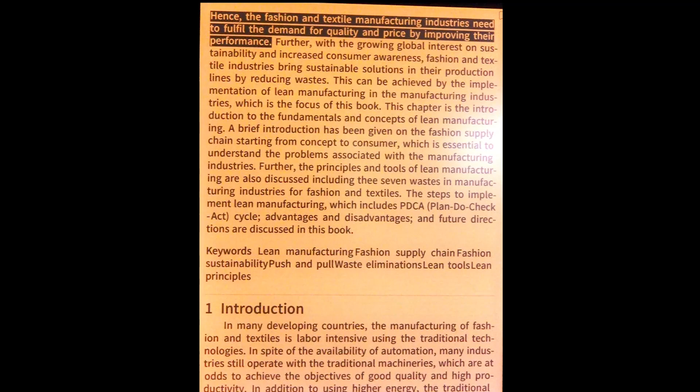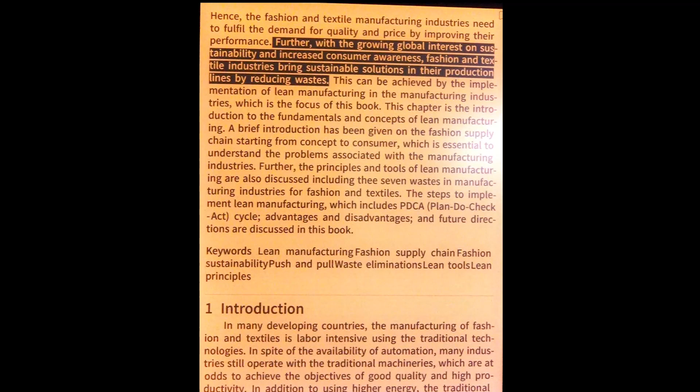And low product quality. The global marketplace is getting more and more competitive day by day with demand on high value-added products at cheaper prices. The fashion and textile manufacturing industries need to fulfill the demand for quality and price by improving their performance. Further, with the growing global interest on sustainability and increased consumer awareness, fashion and textile industries bring sustainable solutions in their production lines by reducing wastes.

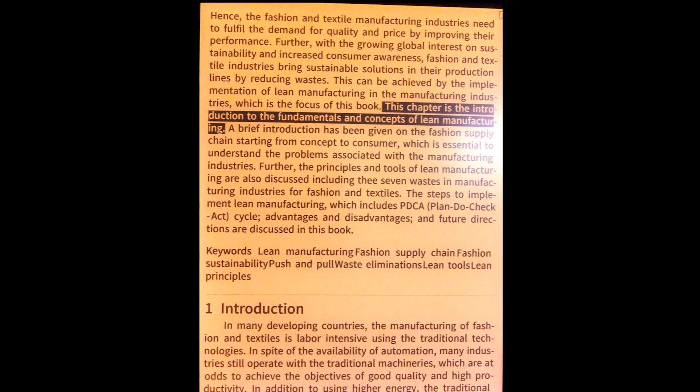This can be achieved by the implementation of lean manufacturing in the manufacturing industries, which is the focus of this book. This chapter is the introduction to the fundamentals and concepts of lean manufacturing. A brief introduction has been given on the fashion supply chain starting from concept to consumer, which is essential to understand the problems associated with the manufacturing industries.

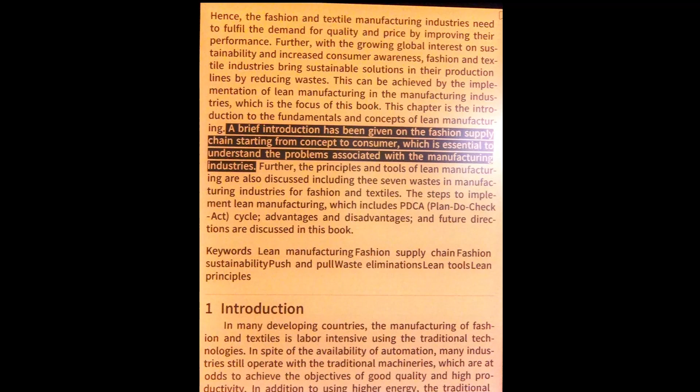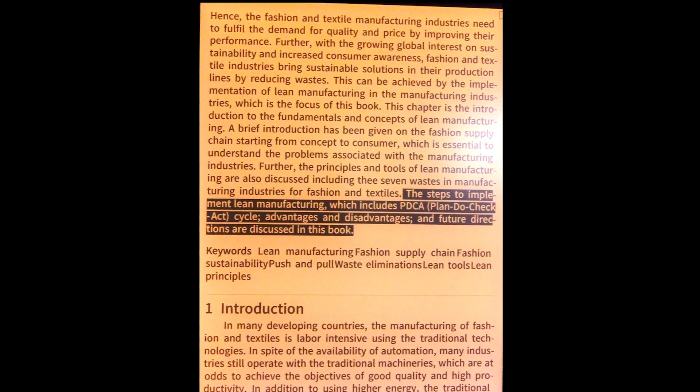Further, the principles and tools of lean manufacturing are also discussed, including the 7 wastes in manufacturing industries for fashion and textiles. The steps to implement lean manufacturing, which includes PDCA, Plan Do Check Act, cycle, advantages and disadvantages, and future directions are discussed in this book. Keywords: lean manufacturing, fashion supply chain, fashion sustainability, push and pull, waste eliminations, lean tools, lean principles.

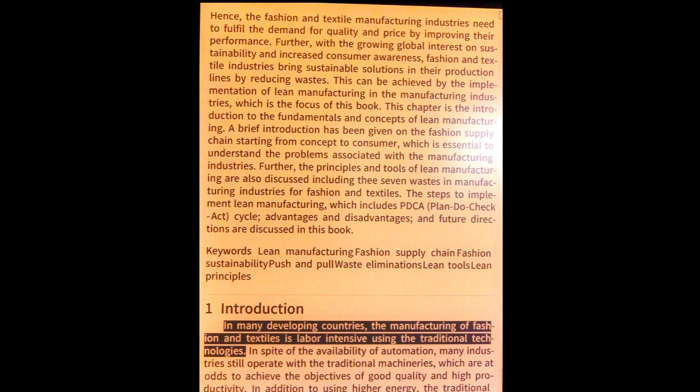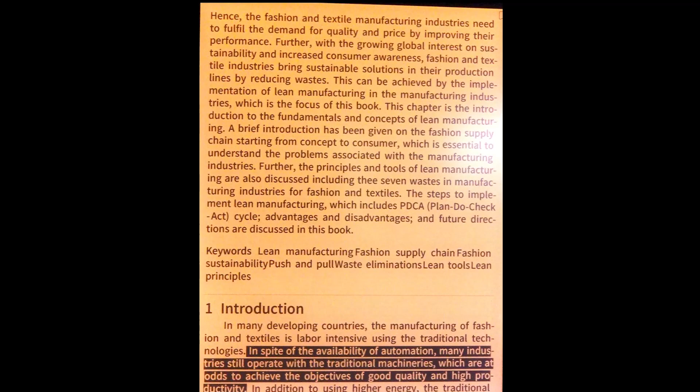1 Introduction. In many developing countries, the manufacturing of fashion and textiles is labor-intensive using the traditional technologies. In spite of the availability of automation, many industries still operate with the traditional machineries, which are at odds to achieve the objectives of good quality and high productivity. In addition to using higher energy, the traditional technologies generate more wastage.

And greenhouse gases. The global demand of fashion and textiles is fulfilled by the manufacturing services of industries located in developing countries. There has been a paradigm shift of manufacturing from developed countries to developing countries. The developing countries such as Vietnam, Cambodia and Bangladesh are the leading manufacturers of fashion and textiles.

The manufacturing activities in China and India, the past leaders, are gradually declining in the drive of keeping the cost of production low. The fashion and textile manufacturers in developing countries are operating in stiffer competition in the global marketplace. The increasing labor cost, rising utility charges, increase in the cost of materials and demand for sustainable fashion and textiles has made it difficult for the manufacturers to produce the products

at cheaper price. Many of the large enterprises in these countries have well coped with the global demand due to larger volume of production and timely investment on new technologies (Nayak et al. 2020B). However, there are several manufacturers of raw materials, trims, semi-finished products, and final garments, especially small and medium-sized enterprises (SMEs), who cannot upgrade themselves due to financial problems; hence, they still operate using the traditional technologies.

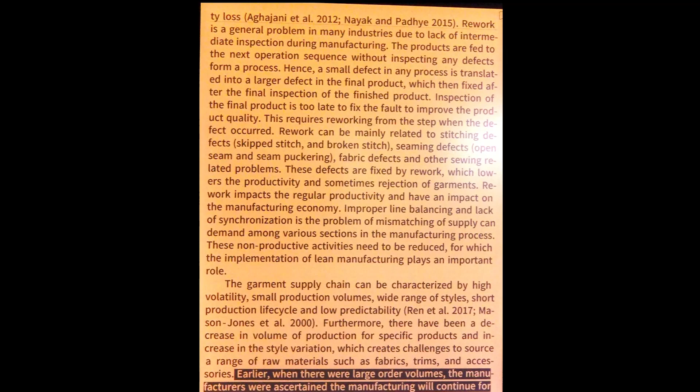2017, Mason-Jones et al. 2000. Furthermore, there has been a decrease in volume of production for specific products and increase in the style variation, which creates challenges to source a range of raw materials such as fabrics, trims, and accessories. Earlier, when there were large order volumes, the manufacturers were assured the manufacturing would continue for several weeks or months. However, decrease in order quantities has led to frequent change of product lines, increased sourcing activities influencing the profitability. In order to cope with these changes, the garment manufacturers need to focus on the implementation of lean manufacturing.

The concept of lean manufacturing is based on reducing waste, reducing inventory, increasing productivity and efficiency by reducing the amount of rework. Majority of the clothing manufacturers in developing countries follow the Progressive Bundle System, PBS, which aims at mass production of apparels, Desai et al. 2012. In the PBS systems, the work related to a specific garment is performed progressively one after the other. Machines and equipment are arranged sequentially depending on the type of the garment forming an assembly line. Multiple assembly lines can be used for a specific garment style.

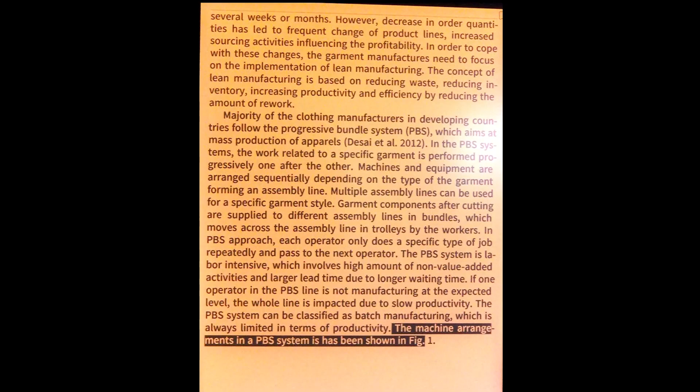Garment components after cutting are supplied to different assembly lines in bundles, which move across the assembly line in trolleys by the workers. In the PBS approach, each operator only does a specific type of job repeatedly and passes to the next operator. The PBS system is labor-intensive, which involves a high amount of non-value-added activities and larger lead time due to longer waiting time. If any operator in the PBS line is not manufacturing at the expected level, the whole line is impacted due to slow productivity. The PBS system can be classified as batch manufacturing, which is always limited in terms of productivity. The machine arrangements in a PBS system are shown in Fig. 1. Fig. 1: PBS system in a garment manufacturing industry.

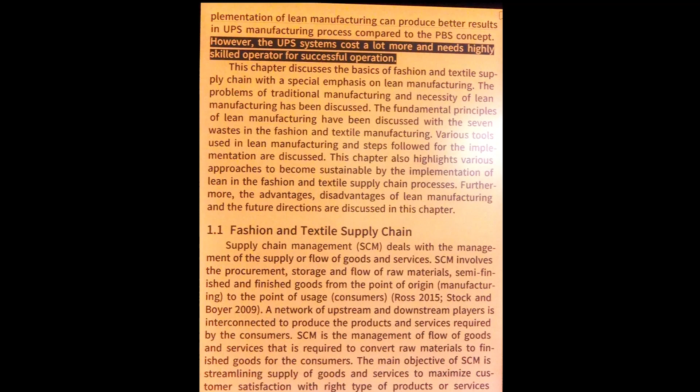To overcome these limitations, the PBS systems can be replaced with cellular manufacturing systems or unit production systems, UPS. In the UPS system, the cut pieces hung on hangers are automatically transported by an overhead conveyor system. One hanger carries all the components for a garment, which is transported automatically. Hence, the manual operations are replaced with an automatic transport system. A garment is manufactured through the different steps of production and the final garment is hung back in the hanger system. The implementation of lean manufacturing can produce better results in the UPS manufacturing process compared to the PBS concept. However, the UPS systems cost a lot more and need highly skilled operators for successful operation.

This chapter discusses the basics of fashion and textile supply chain with a special emphasis on lean manufacturing. The problems of traditional manufacturing and necessity of lean manufacturing have been discussed. The fundamental principles of lean manufacturing have been discussed with the 7 wastes in fashion and textile manufacturing. Various tools used in lean manufacturing and steps followed for the implementation are discussed. This chapter also highlights various approaches to become sustainable by the implementation of lean in the fashion and textile supply chain processes. Furthermore, the advantages, disadvantages of lean manufacturing and the future directions are discussed in this chapter.

1.1 Fashion and Textile Supply Chain. Supply Chain Management (SCM) deals with the management of the supply or flow of goods and services. SCM involves the procurement, storage and flow of raw materials, semi-finished and finished goods from the point of origin, manufacturing, to the point of usage, consumers, Ross 2015, Stock and Boyer 2009. A network of upstream and downstream players is interconnected to produce the products and services required by the consumers.

SCM is the management of flow of goods and services that is required to convert raw materials to finished goods for the consumers. The main objective of SCM is streamlining supply of goods and services to maximize customer satisfaction with the right type of products or service, Christopher 2016. SCM can be defined as the design, planning, execution, control and monitoring of supply chain activities with the objective of creating net value, building a competitive infrastructure.

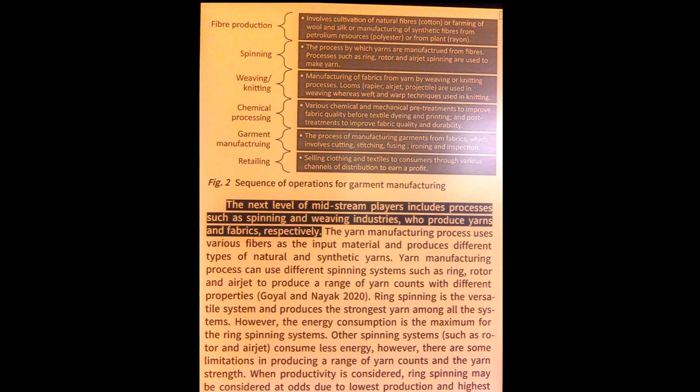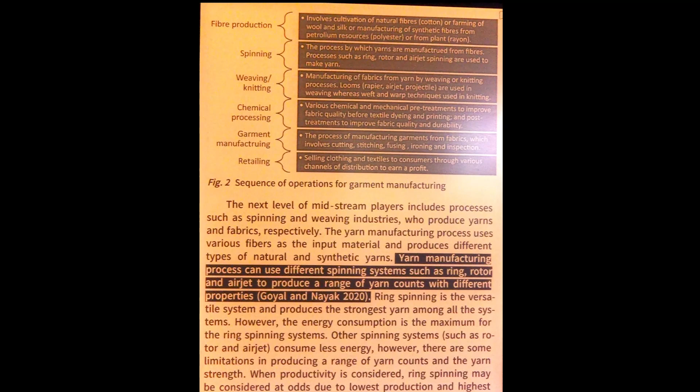The next level of midstream players includes processes such as spinning and weaving industries, who produce yarns and fabrics, respectively. The yarn manufacturing process uses various fibers as the input material and produces different types of natural and synthetic yarns. Yarn manufacturing can use different spinning systems such as ring, rotor and air-jet to produce a range of yarn counts with different properties, Goyal and Nayak 2020.

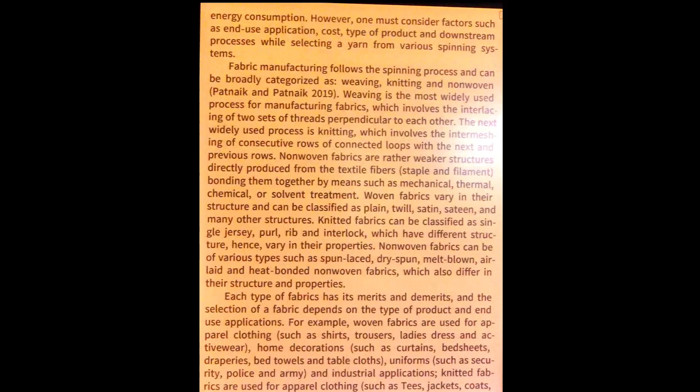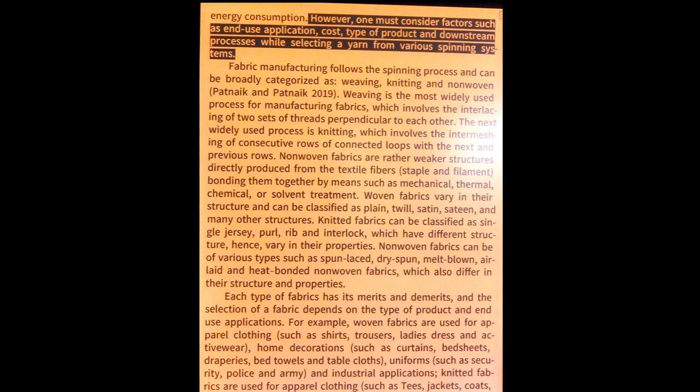Ring spinning is the versatile system and produces the strongest yarn among all the systems. However, the energy consumption is the maximum for ring spinning systems. Other spinning systems, such as rotor and air-jet, consume less energy. However, there are some limitations in producing a range of yarn counts and the yarn strength. When productivity is considered, ring spinning may be considered at odds due to lowest production and highest energy consumption. However, one must consider factors such as end-use application, cost, type of product and downstream processes while selecting a yarn from various spinning systems. Fabric manufacturing follows the spinning process and can be broadly categorized as weaving, knitting and nonwoven,

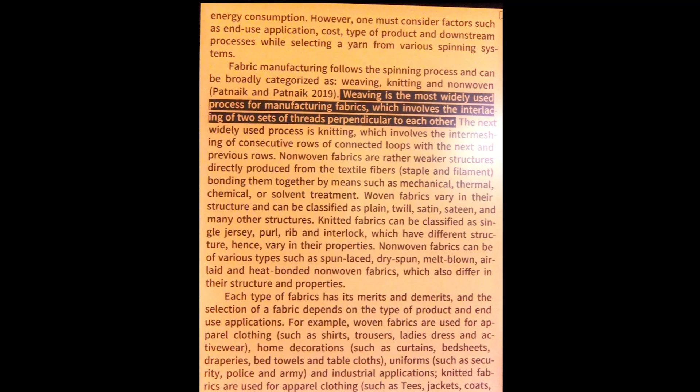Patnaik and Patnaik 2019. Weaving is the most widely used process for manufacturing fabrics, which involves the interlacing of two sets of threads perpendicular to each other. The next widely used process is knitting, which involves the intermeshing of consecutive rows of connected loops with the next and previous rows. Nonwoven fabrics are rather weaker structures directly produced from the textile fibers, staple and filament, bonding them together by means such as mechanical, thermal, chemical

or solvent treatment. Woven fabrics vary in their structure and can be classified as plain, twill, satin, sateen, and many other structures. Knitted fabrics can be classified as single jersey, purl, rib and interlock, which have different structures, hence vary in their properties. Nonwoven fabrics can be of various types such as spun-laced, dry spun, melt-blown, air-laid and heat-bonded nonwoven fabrics, which also differ in their structure and properties. Each type of fabric has its merits and demerits, and the selection of a fabric depends on the type of

product and end-use applications. For example, woven fabrics are used for apparel clothing, such as shirts, trousers, ladies' dresses and activewear, home decorations such as curtains, bed sheets, draperies, bed towels and tablecloths, uniforms such as security, police and army, and industrial applications.

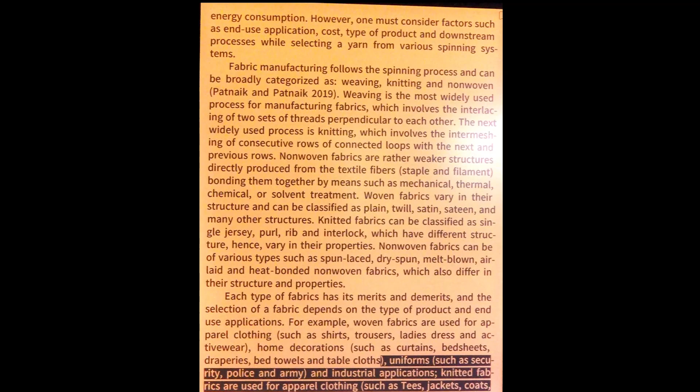Knitted fabrics are used for apparel clothing such as tees, jackets, coats, jumpers and pants, innerwear such as camisoles, undies, girdles, sleepwear and vests, sportswear such as socks, sports shoes, tracksuits and vests, home furnishings such as cleaning wipes, laundry bags and mosquito nets, and automotive textiles such as headrest lining, cushioning material and lining for motorbike helmets. Nonwovens are used for medical textiles such as surgical masks, surgery

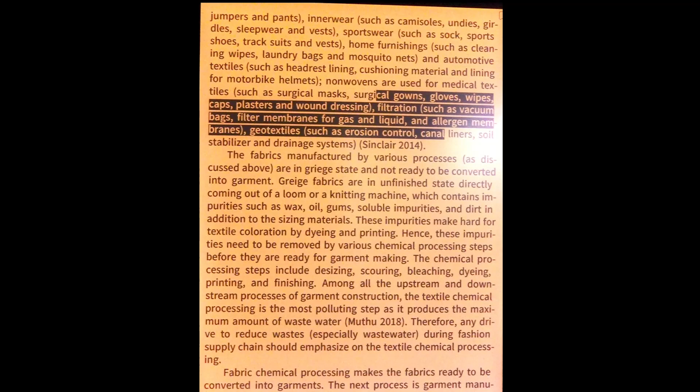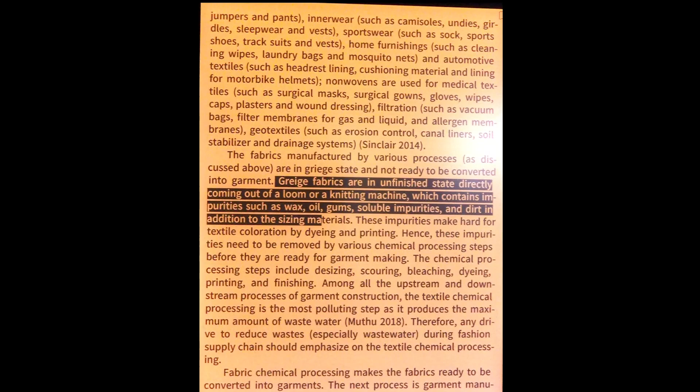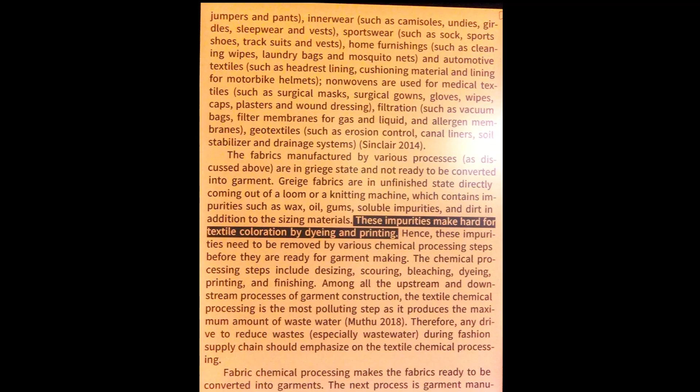such as erosion control, canal liners, soil stabilizers and drainage systems, Sinclair 2014. The fabrics manufactured by various processes, as discussed above, are in greige state and not ready to be converted into a garment. Greige fabrics are in an unfinished state directly coming out of a loom or a knitting machine, which contain impurities such as wax, oil, gums, soluble impurities, and dirt in addition to the sizing material. These impurities make textile coloration by dyeing and printing hard. Hence, these impurities need to be removed by various chemical processing steps before they are ready for garment making.

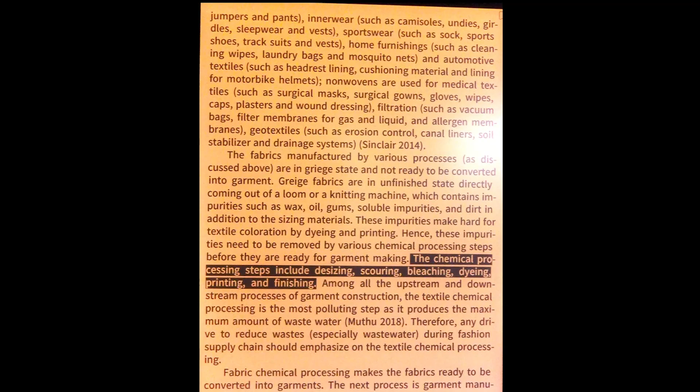The chemical processing steps include desizing, scouring, bleaching, dyeing, printing, and finishing. Among all the upstream and downstream processes of garment construction, the textile chemical processing is the most polluting step as it produces the maximum amount of wastewater (Muthu 2018). Therefore, any drive to reduce wastes, especially wastewater, during the fashion supply chain should emphasize textile chemical processing. Fabric chemical processing makes the fabrics ready to be converted into garments.

The next process is garment manufacturing, where the two-dimensional (2D) fabrics are converted into three-dimensional (3D) garments. The garment manufacturing process involves activities such as fabric inspection, spreading, cutting, bundling, fusing, sewing, ironing, inspection and packaging (Nayak and Padhye 2015). The global trend in garment manufacturing has undergone many changes from the beginning of the 21st century.

The global demand for apparel textiles is being fulfilled by only some developing countries such as Bangladesh, Cambodia, China, Laos, India, Vietnam and some countries in the European Union (EU). The manufacturing of garments at cheaper prices in developed countries such as the US, Australia or Canada is not viable due to high labor cost and energy charges. Therefore, they rely on the developing countries to fulfill their demand for fashion and textiles. In developing countries, the fashion and textile industries provide employment to a large section of the population. This sector also contributes largely towards the gross domestic product (GDP) of the countries (Nayak et al.

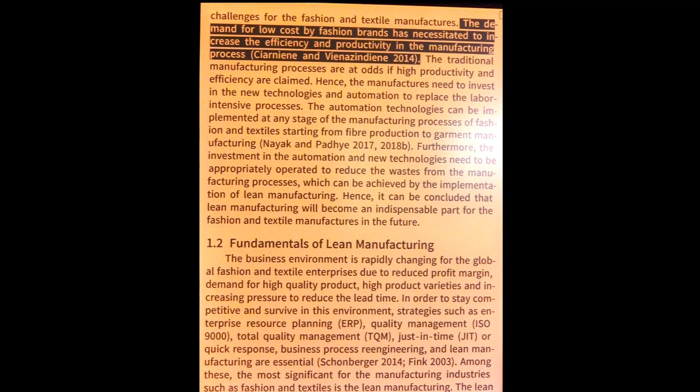The competitive global marketplace is creating a lot of challenges for the fashion and textile manufacturers. The demand for low cost by fashion brands has necessitated increasing the efficiency and productivity in the manufacturing process (Ciarniene and Vienazindiene 2014). The traditional manufacturing processes are at odds if high productivity and efficiency are claimed. Hence, the manufacturers need to invest in new technologies and automation to replace the labor-intensive processes. The automation technologies can be implemented at any stage of the manufacturing processes of fashion and textiles, starting from fiber production to garment manufacturing (Nayak and Padhye 2017,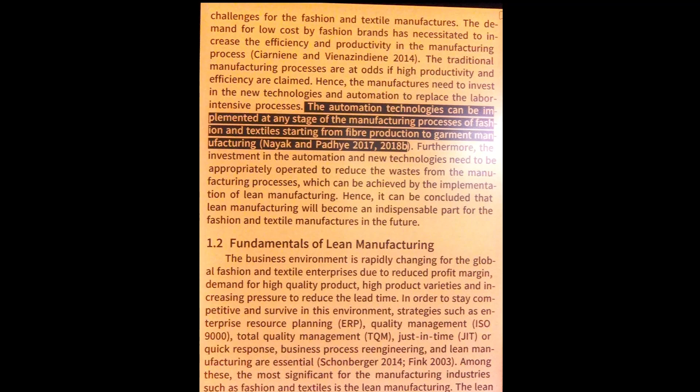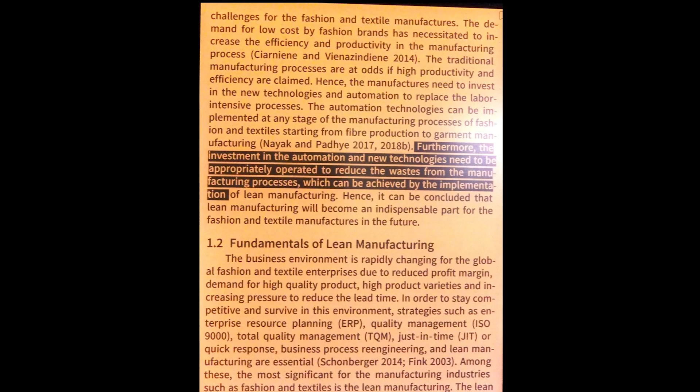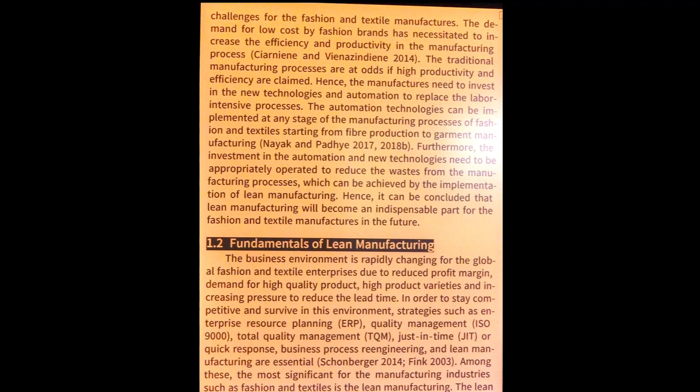2018b). Furthermore, the investment in automation and new technologies needs to be appropriately operated to reduce the wastes from the manufacturing processes, which can be achieved by the implementation of lean manufacturing. Hence, it can be concluded that lean manufacturing will become an indispensable part for the fashion and textile manufacturers in the future. 1.2 Fundamentals of Lean Manufacturing. The business environment is rapidly changing for the global fashion and textile enterprises

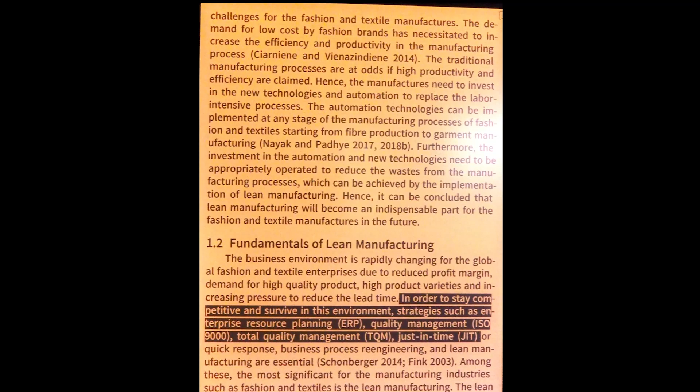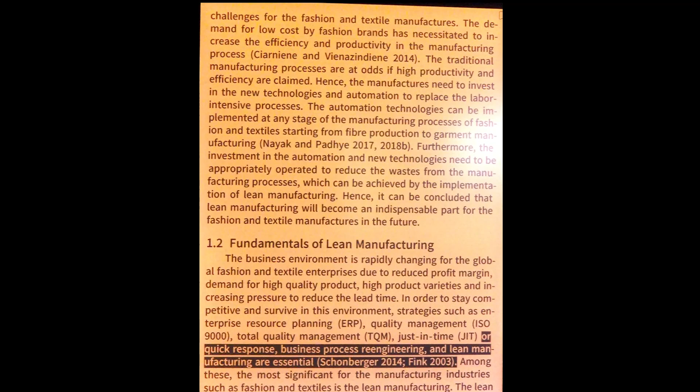due to reduced profit margin, demand for high-quality products, high product varieties and increasing pressure to reduce the lead time. In order to stay competitive and survive in this environment, strategies such as enterprise resource planning (ERP), quality management (ISO 9000), total quality management (TQM), just-in-time (JIT) or quick response, business process re-engineering, and lean manufacturing are essential (Schonberger 2014, Fink 2003). Among these, the most significant for manufacturing industries such as fashion and textiles is lean manufacturing. The lean manufacturing approach has been widely adopted by many fashion and textile enterprises in order to enhance productivity, efficiency and to achieve the desired quality.

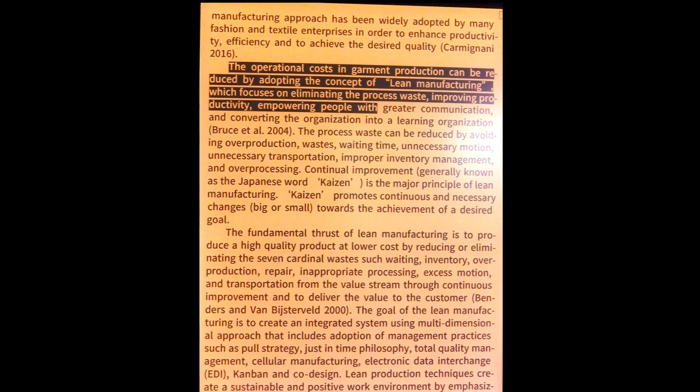(Carmignani 2016). The operational costs in garment production can be reduced by adopting the concept of lean manufacturing, which focuses on eliminating the process waste, improving productivity, empowering people with greater communication, and converting the organization into a learning organization (Bruce et al. 2004). The process waste can be reduced by avoiding overproduction, wastes, waiting time, unnecessary motion, unnecessary transportation, improper inventory management, and overprocessing.

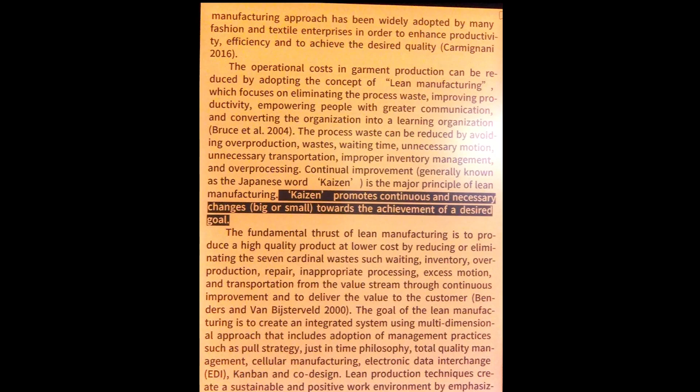Continual improvement, generally known by the Japanese word kaizen, is the major principle of lean manufacturing. Kaizen promotes continuous and necessary changes, big or small, towards the achievement of a desired goal. The fundamental thrust of lean manufacturing is to produce a high-quality product at lower cost by reducing or eliminating the 7 cardinal wastes, such as waiting, inventory, overproduction, repair, inappropriate processing, excess motion, and transportation, from the value stream through continuous improvement, and to deliver the value to the customer.

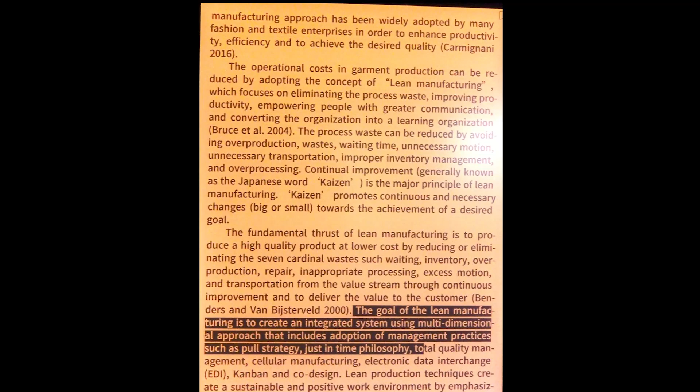Benders and Van Bijsterveld 2000. The goal of lean manufacturing is to create an integrated system using a multi-dimensional approach that includes adoption of management practices such as pull strategy, just-in-time philosophy, total quality management, cellular manufacturing, electronic data interchange (EDI), Kanban and co-design.

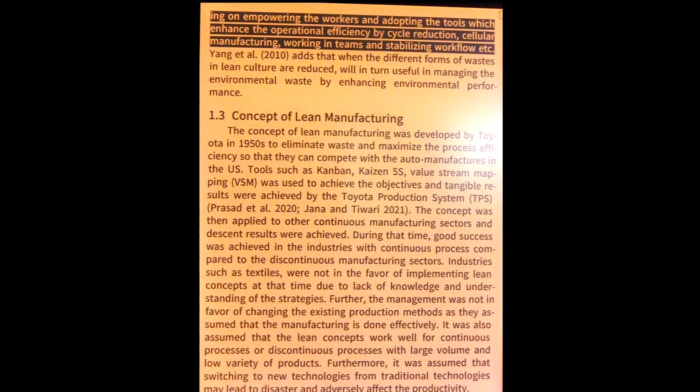Lean production techniques create a sustainable and positive work environment by emphasizing empowering the workers and adopting tools which enhance operational efficiency by cycle reduction, cellular manufacturing, working in teams and stabilizing workflow, etc. Yang et al. 2010 adds that when the different forms of wastes in lean culture are reduced, it will in turn be useful in managing environmental waste by enhancing environmental performance.

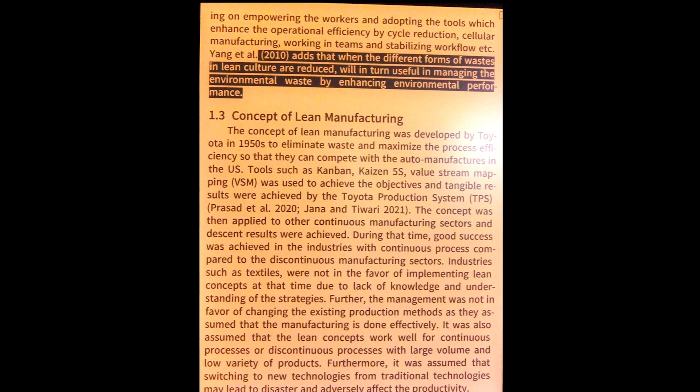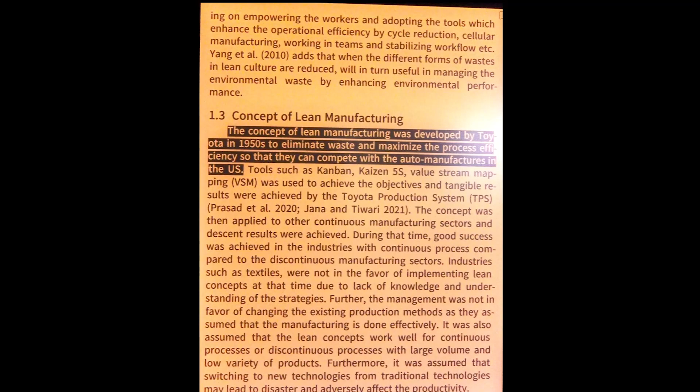1.3 Concept of lean manufacturing. The concept of lean manufacturing was developed by Toyota in the 1950s to eliminate waste and maximize process efficiency so that they could compete with auto manufacturers in the US. Tools such as Kanban, Kaizen, 5S, Value Stream Mapping (VSM) were used to achieve the objectives, and tangible results were achieved by the Toyota Production System (TPS).

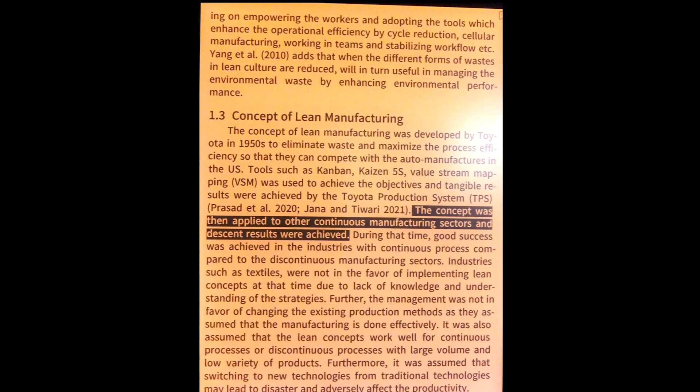Prasad et al. 2020, Jana and Tiwari 2021. The concept was then applied to other continuous manufacturing sectors and decent results were achieved. During that time, good success was achieved in industries with continuous processes compared to discontinuous manufacturing sectors. Industries such as textiles were not in favor of implementing lean concepts at that time due to lack of knowledge and understanding of the strategies.

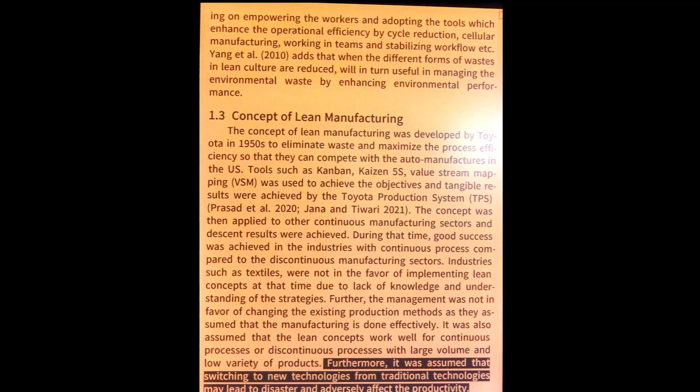Further, the management was not in favor of changing the existing production methods as they assumed that the manufacturing is done effectively. It was also assumed that lean concepts work well for continuous processes or discontinuous processes with large volume and low variety of products. Furthermore, it was assumed that switching to new technologies from traditional technologies may lead to disaster and adversely affect productivity.

Lean manufacturing concept refers to the process from raw materials manufacturing to the delivery of finished goods to the end user, with tactful management of resources resulting in monetary and time saving. It is sometimes referred to as just-in-time (JIT) systems due to their highly coordinated activities and delivery of goods that occur just as they are needed. Stevenson 2020. Lean manufacturing minimizes waste and in turn reduces costs, from which the technical term, lean, became popular ever since.

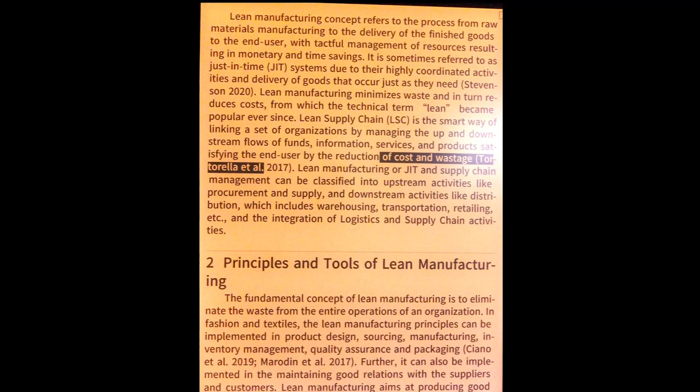Lean Supply Chain (LSC) is the smart way of linking a set of organizations by managing the up and downstream flows of funds, information, services, and products, satisfying the end user by the reduction of cost and wastage. Tortorella et al. 2017. Lean manufacturing or JIT and supply chain management can be classified into upstream activities like procurement and supply, and downstream activities like distribution, which includes warehousing, transportation, retailing, etc., and the integration of logistics and supply chain activities.

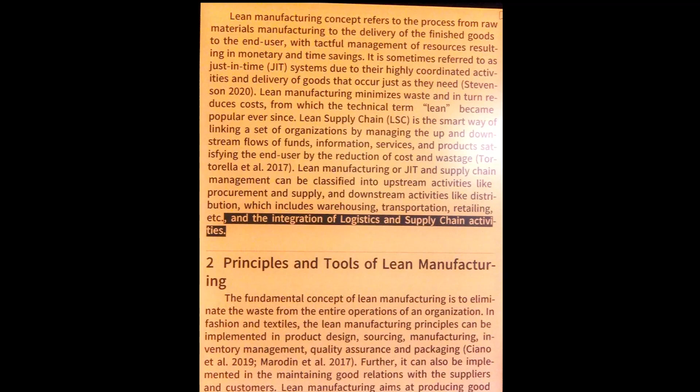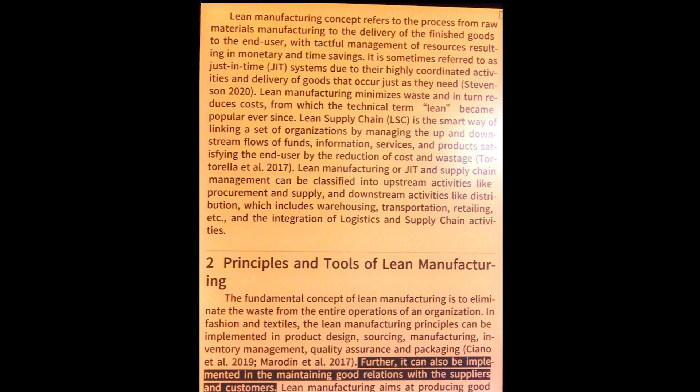2 Principles and tools of lean manufacturing. The fundamental concept of lean manufacturing is to eliminate waste from the entire operations of an organization. In fashion and textiles, lean manufacturing principles can be implemented in product design, sourcing, manufacturing, inventory management, quality assurance and packaging, Ciano et al. 2019, Marodin et al. 2017. Further, it can also be implemented in maintaining good relations with suppliers and customers.

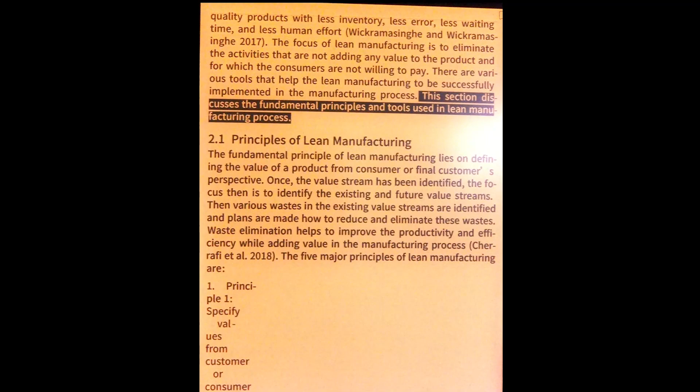Lean manufacturing aims at producing good quality products with less inventory, less error, less waiting time and less human effort, Wickramasinghe and Wickramasinghe 2017. The focus of lean manufacturing is to eliminate the activities that are not adding any value to the product and for which consumers are not willing to pay. There are various tools that help lean manufacturing to be successfully implemented in the manufacturing process. This section discusses the fundamental principles and tools used in the lean manufacturing process.

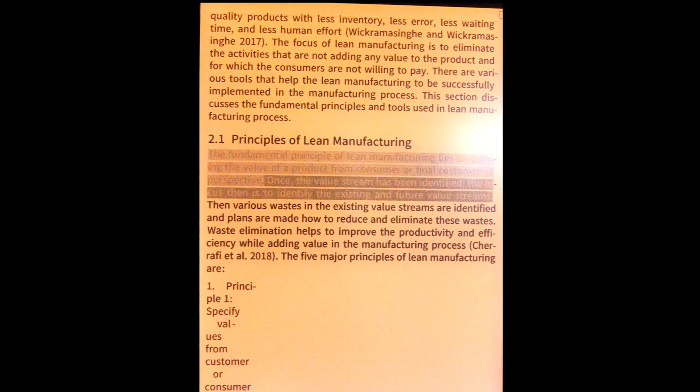2.1 Principles of lean manufacturing. The fundamental principle of lean manufacturing lies in defining the value of a product from the consumer or final customer's perspective. Once the value has been identified, the focus then is to identify the existing and future value streams. Then various wastes in the existing value streams are identified and plans are made on how to reduce and eliminate these wastes. Waste elimination helps to improve productivity and efficiency while adding value in the manufacturing process, Cherrafi et al. 2018.

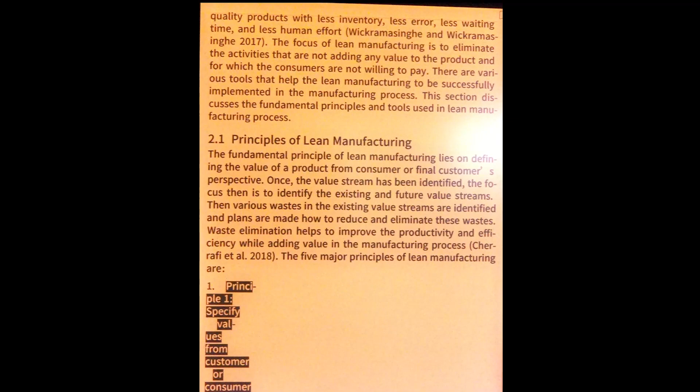The 5 major principles of lean manufacturing are: Principle 1. Specify values from the customer or consumer... are manufactured and delivered to the customers following the principles of the pull approach. Principle 5. The process of identifying and eliminating wastes is repeated until approaching perfection in the value stream.